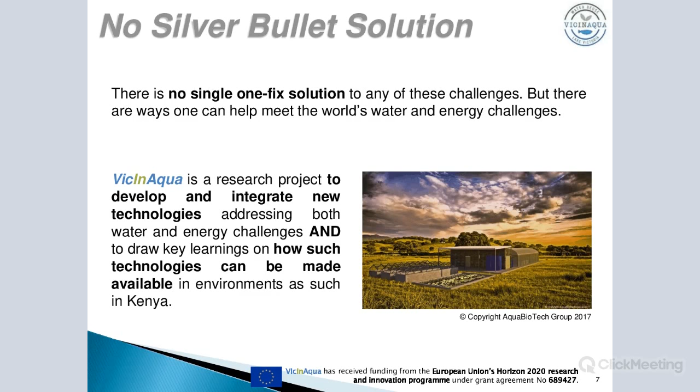Now I want to hand over to Professor Jan Hoinkis to talk more in detail about the use case of VicInAqua. Yeah, thank you.

I would like to give you a project overview. So what is the VicInAqua rationale?

How is the situation on Lake Victoria, one of the biggest freshwater lakes on our planet? It's a typical example, not only in Africa but also in Asia and other regions on our planet. High population, rapid urbanization - this is a general problem everywhere.

There's a high rate of poverty, poor sanitation system, and the growth of the fish processing industry hampered the fishing. So the yield of the fishing industry was on decline during the last years, and there's only few fish left due to this bad water situation in the lake.

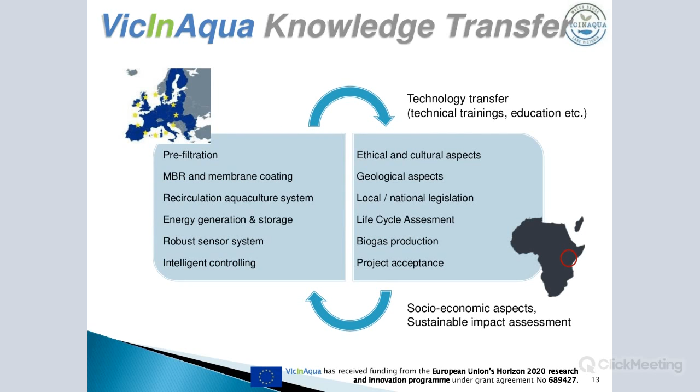So, okay, just a quick look, a general look on the knowledge transfer. Basically, we can say that the novel technology from the European partners will be transferred to the environment near Lake Victoria. And of course, there should be feedback on socioeconomic aspects on different levels coming from our African partners, so that we can suit and adapt everything from the European perspective, that we get the feedback on what the needs and the requirements are in Africa. So this is just in general shown by this slide.

And this water treated by the MBR from the system, the surplus water, can be used for agriculture and irrigation. Later we can show you the photo that we have prepared, a small field where we want to grow some vegetables and some other plants, and this will be irrigated by the water from the system. And the energy supplied is generated by PV and biogas.

So it's very important to notice that the system is not completely autonomous. At the beginning, we were planning 100% autonomy. However, we learned that this is not required. So we are providing a majority of the energy by PV, by renewable energies. However, we also connect it to the grid. And very important in Africa, there are frequent power outages, and handling these power outages with our system was our main concern. If we could not feed any oxygen to the fish or to the MBR, everything would be killed. So we have to ensure a smooth operation of the system, and this is our main concern.

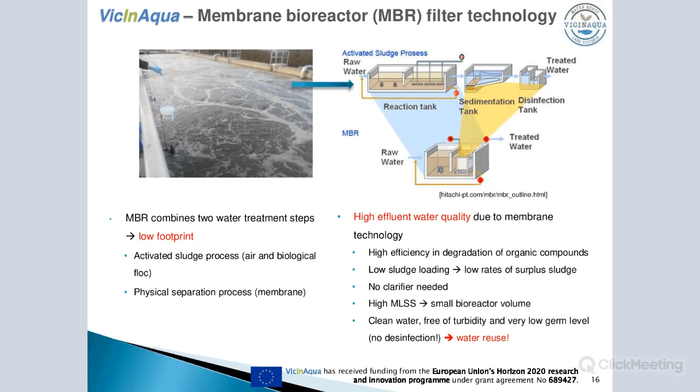And on the right down, you could see other advantages. The mixed liquor suspended solids concentration is much higher, so it's more efficient. The degradation process is more efficient, and so, as I said, in summary, it's perfectly suited for water reuse.

The other field where our Italian partners are working on, no details because it's too short and we have not much time. And just to give you the basic idea, we're starting with the commercial MBR membranes, polymer membranes basically. And what we try is to improve the so-called anti-fouling properties of this membrane. So fouling layer on membrane, this is the great concern and the major problem in real application of the MBRs. And we try to cast a novel anti-fouling layer on top.

It's cured by UV light. And so we have done a lot of work already in the lab, and this will be coming, and the pilot test will be tested in Africa as well. And this SEM down at the bottom shows you this is a nanostructured novel coating which shows antimicrobial properties, so repelling any fouling agents, and it's also a very smooth surface.

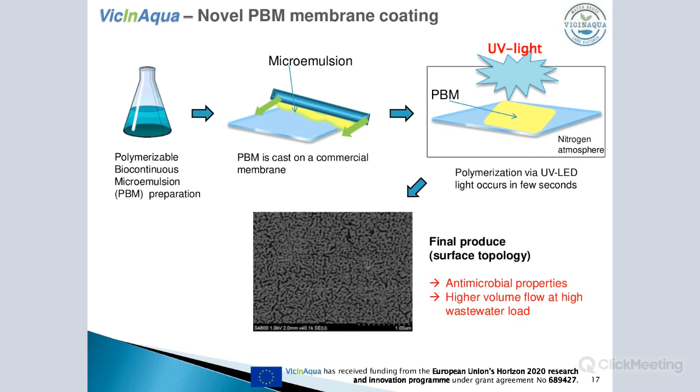And what we have shown already on small pilot is that we can run a higher volume flow in general, in long term. So that definitely will reduce the operating cost and the capital cost as well. So this slide shows you two of our results. So with the model foulant humic acid, on top you could see the commercial membrane and the PBM coated, showing a thinner fouling coating on the membrane. So just one general image on this.

And as you know, in these systems, the membrane will be submerged in the activated sludge tank and will be run by suction, left hand up. You could see the suction pump, and this is also what we have set up in Kisumu in Kenya already, so we are ready to go. We first want to start with the commercial membranes, and in a later phase we want to compare in the same tank the novel membranes with the commercial ones and hopefully see the benefit of this.

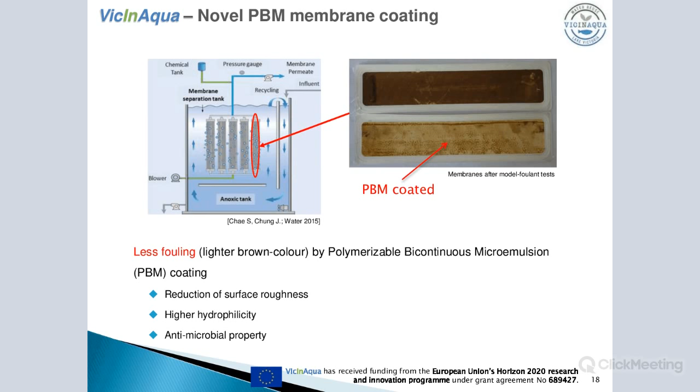As already mentioned, reduction of surface roughness, higher hydrophilicity and antimicrobial property. These are the characteristics of the novel coating. Okay, now I can pass the floor to Julian. We are now coming to the RAS system, which is set up and will be monitored by our partner from Malta.

So, Julian. Thank you. So the water from the MBR system, actually in the pilot, we're also including a UV system. So the permeate, the product water coming from the MBR, from the wastewater treatment system, is actually being passed through a UV before coming into the aquaculture system.

As regards the RAS system, the aim of this is to create a training facility, although the facility will be used as a hatchery. The aim is to have a system which will be used for training and development purposes. The capacity of the system is 25,000 fingerlings per month, which is not a huge system, but it's of a capacity which is suitable to show how things work, how the different systems work together.

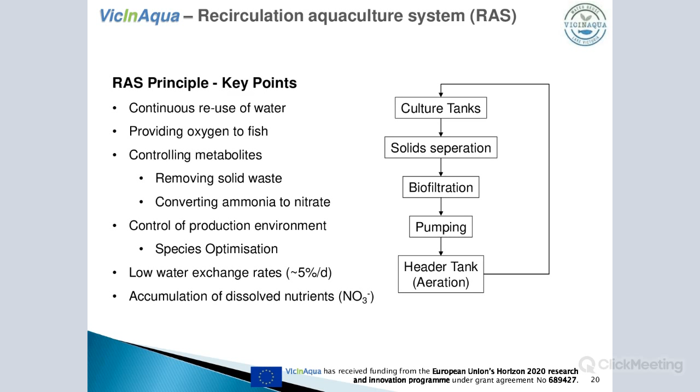The idea was to use as much as possible local materials. On the left hand side, we designed and built fiberglass tanks, which, although these were built at our facilities and shipped over, is something which can also be built locally, but as the cost of tanks goes, this can't compare to the cost of standard plastic tanks, as can be seen in the nursery. So we try to include tanks which are locally available and available at a good price.

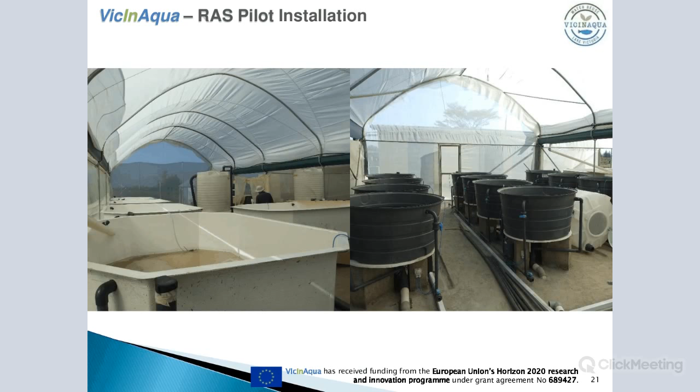Yes, what else? And then just 2 slides about the monitoring system. So the monitoring system is measuring in the RAS system. Of interest is the dissolved oxygen in the tank and the temperature and pH in the biofilter. So as monitoring and control goes within the RAS, we're looking at the normal dissolved oxygen, temperature, pH, which are essential in controlling and operating the RAS system.

But the monitoring system is also used in the monitoring and control of the wastewater treatment system and also the energy system. So it is a bit over designed in the sense that there's a lot of equipment included in the monitoring and control system, because as part of the project we wanted to monitor everything remotely and then decide on what is the most important for such a system, which comes at a later package in the project.

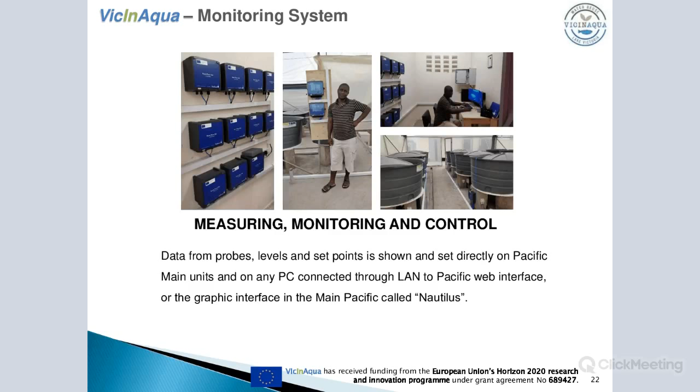So over here, the monitoring and control system basically can log, and you can view all the sensor data on individual units within the RAS system or within the water treatment system, but also it can be viewed on the main computer, which, if connected to the internet, can be remotely viewed and controlled. This is all done by the partner from Denmark called OxyGuard.

And in the second slide, on the left-hand picture, you could see this is the interface, which shows the dissolved oxygen and temperature per tank in the system, and the water levels and pH within the biofiltration system. This is all connected to alarms, so whenever a value goes above or below a set limit, there are visual alarms, which can also come on your mobile phone.

And also importantly, in the RAS system, if the dissolved oxygen within a certain tank goes below a certain level, we have emergency oxygen dosing. So pure oxygen will be dosed directly to the tanks if the dissolved oxygen drops below a certain level. And this is important in case of extended power cuts. So in case of a very long power cut and there's no electricity, although we have the renewable backup, we also have another backup, which is the emergency dosing of oxygen. All this is automatically done.

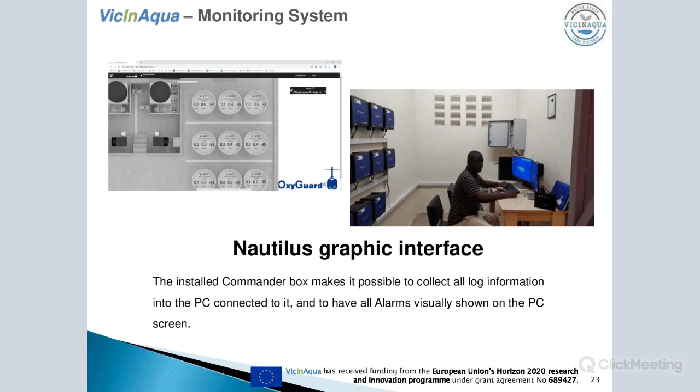Okay, thank you, Julian. Yeah, now I'm coming to our renewable energy concept. As mentioned before, there are actually two systems. One is based on PV, photovoltaics.

One is on biogas. And we have designed a 15 kilowatt peak system to provide the majority of the energy, and a battery capacity of 30 kilowatt hours to run the system also during night and during power outages. And as mentioned, to supply all energy to critical consumers such as the aeration system.

In addition, we also have a compressed oxygen system if all power fails, so that we are able to keep all the fish and the MBR alive. So this is very important. We have a multi-step system.

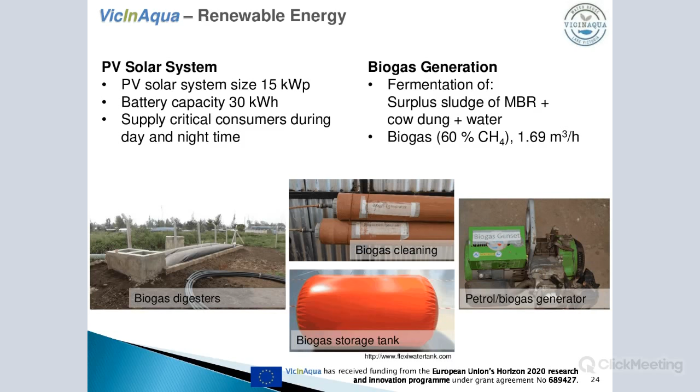So I can move on to the next slide, which is the novel technology we want to involve in the project. It's called thermoelectric generator. So what is a thermoelectric generator, TEG? To be honest, it's a rather old technology. It was mainly used in space to supply energy to satellites and so on. And what is new is that the price or the cost of these systems dropped significantly. And now it's going to be interesting also to be applied in environments like Africa, Europe, and so on.

What is the basic principle, without giving you too much detail? You need just a hot side and a cool side, and this temperature difference, it's called the Seebeck effect. Probably you have heard about this. It's a physical effect, a rather old effect. And you need just a block of material. You need to heat one side, you have to cool the other side, and this is giving you a current or electrical energy. And the efficiencies are still low.

However, the very benefit of this system is you have no moving parts. It's very simple. And if you have the material, you can run it for many years, 10 years, 15 years without any changes, and you can just harvest the energy in a very simple manner. And you can also for sure calculate your operating cost, invest cost, and this is what we want to do in this project, to see in future whether it makes sense to involve this technology.

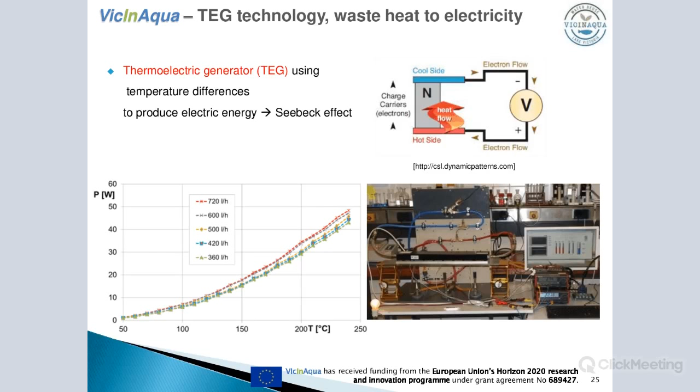So the next slide shows you our combined system. On the left hand, this is the improvement of the PV panels. This is provided by a patented solution from our German partners: the combined PV with the TEG. As you may know, the drawback of all PV panels is that there will be a significant reduction in efficiency by heating. So the higher the temperature of the PV panel, the lower the electrical efficiency. And so it's wise to cool the panels in order to increase this.

And this will be done, number one, by the TEG. So the TEG will be fixed with its hot side to the PV. And there will also be a cool side at the bottom, so that one of the effects of the TEG module is to cool the system, and the TEG is also able to harvest some energy. And one of the ideas, and we're going to test this on the ground in our pilot activities next, is to set up swimming PV panels. So a cooling fin, which is also able to float on the surface of the water.

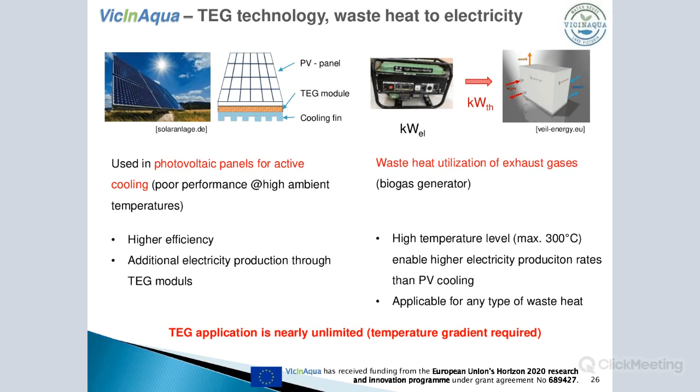So this is our novel pilot testing, and the majority of the energy on the pilot plant in Kisumu will be provided by conventional PV panels. So the testing is just done by a small part, and it's not contributing very much to the system. So this 15 kilowatt peak is basically provided by conventional PV panels, which are also available in Africa and everywhere, and which now looks like a very, very economic solution due to the price drop during the last 5 to 10 years.

So just to recall what I was starting with. Now we have looked into the RAS system explained by Julian. We had some remarks on the MBR with the novel membranes. We have the renewable energy mentioned, and Julian explained also the basics of the online monitoring system. So it's just to recall, to summarize all this, the technical concept.

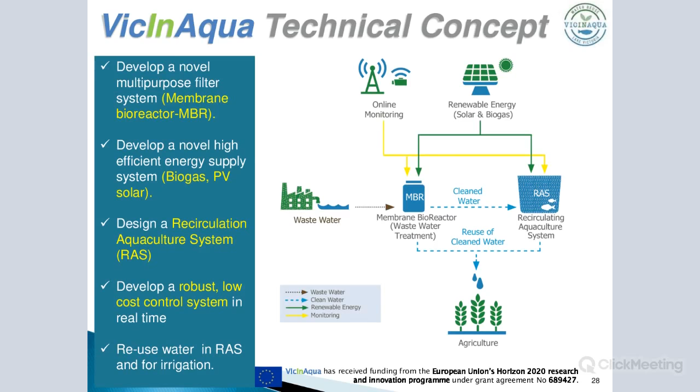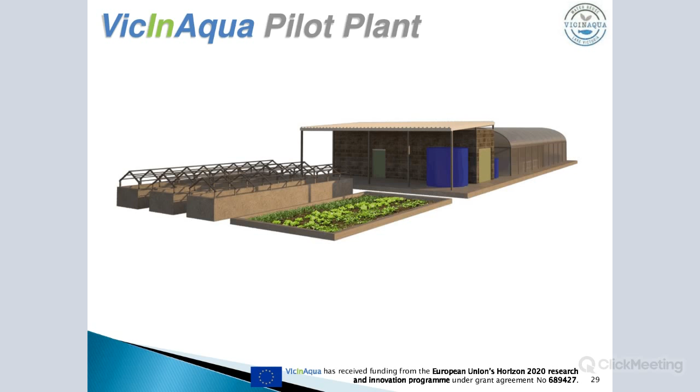And this is an image by Julian's group, an animation of what it basically looks like. On the right hand, you can see the tunnels with all these RAS systems, the hatchery, and there is a small building with an MBR inside and some tanks outside, and we have also a small office; part of the office is used for monitoring some chemical parameters, water parameters. So I can move on to give you some details on the pilot site.

Initially we thought also to involve fish factory wastewater. However, the fish factories are farther away, and we will study this in the later phase. So at the moment we are focusing just on domestic wastewater near this pond. If needed, we could also take the already pre-treated water.

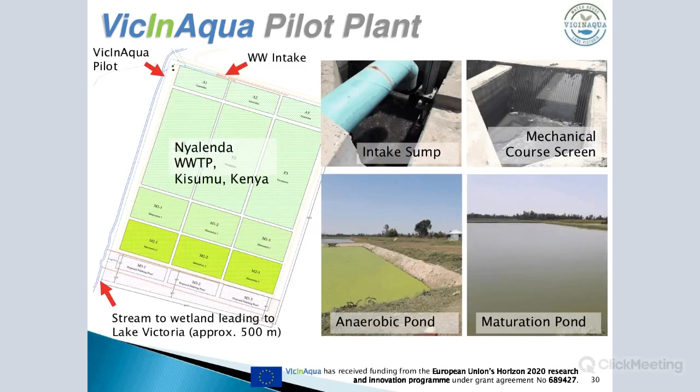So what we want to start with is the real domestic wastewater entering the pond, but we could also use water from the maturation pond or from any other stage to feed in. So we have a great flexibility. There's plenty of water available at different quality levels. And the drain of this wastewater treatment plant goes directly into the lake. So this is one of the very popular technologies in Africa, to use waste ponds like this.